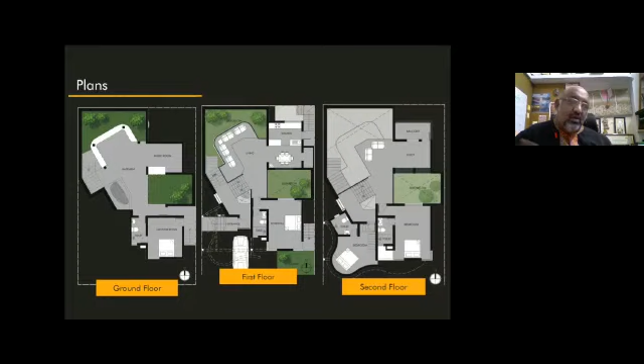The other idea was to try and see in terms of minimizing the total usage of walls. So can it be spaces which move from one volume to another, and in between becomes only private spaces for the bathroom and the bedroom? Otherwise, can each space overlap each other?

So we got a basement where the interaction spaces, entertainment area happens, where the courtyard, the two courtyards happen in the basement, and then we have an attendant's room and attached bathroom for that.

And you enter at the ground level, and then it's split down. It has a split level where you go to the ground floor and you have the living, kitchen, dining space, and one bedroom, and you go down to the basement here.

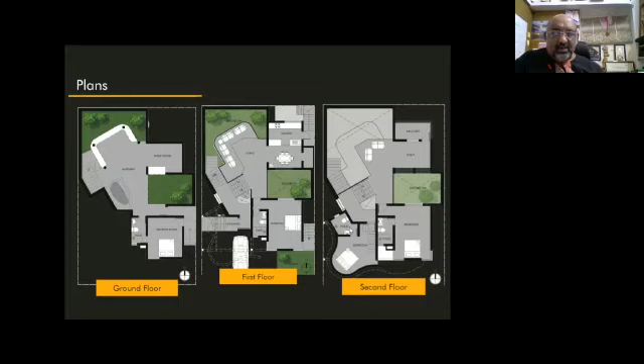You come to the first floor, and at the mid level, you will have the child's bedroom. In the upper level, you will have the bedroom for the parents and the study area with the balcony, overlooking the living and the courtyard spaces on either side.

So somewhere integrate that whole thing together, that was the whole idea. The kids' room, which was the slated element out here, had a double height, had a mezzanine floor for study and things like that.

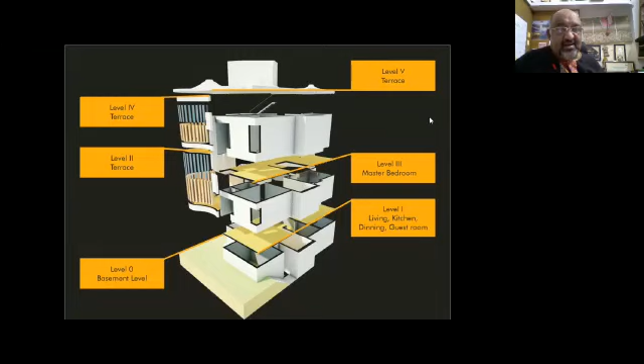So the front volume which you see is actually the kids' room, overlooking the tree there. He gets to see a little bit of birds, and these are mirrored single side window glasses, so he is able to see across from inside the room, but the reflection of the tree is cast on the facade.

This is the basement floor area where the courtyard happens, and basic pots become the lamp fixtures.

This is what we call a filler slab. We need to understand: do I need to load my slab to such a level that its self weight makes it too heavy to spread across? The whole idea of a slab is to spread and transfer its loads onto a beam, and thereby back to a column. Filler slab has been practiced for a long time, infilling the slab with other materials wherever you don't need concrete, reducing its self weight and allowing it to span a larger volume with minimal steel. So you see that happening on the slab.

We had local craftsmen working with oxide floors, a black and yellow oxide floor. We had a very good artist in our office, Sham, who sketched these lines, and the oxide floor people came, chipped out the lines, and filled it with yellow oxide. We got some amazing patterns. You can break even simple systems - the moment we talk about oxide it's red oxide with lines on either side and a green patch, but you can break that and create new geometries.

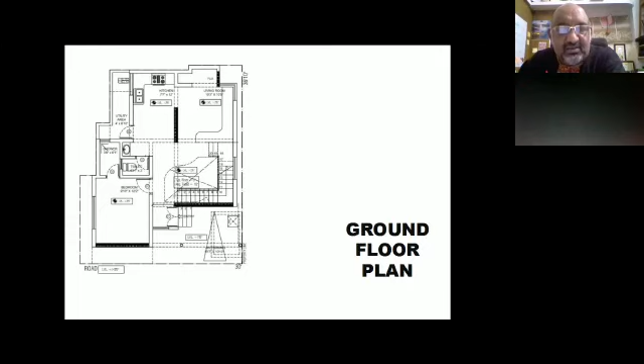Again, a ferrocement wall which becomes a library on the inside - we took the idea of folding the corners of a page when reading a book onto the facade. So it becomes a sculptural element. It doesn't require too much cement or concrete, but it's done out of ferro cement, and becomes very interesting bookshelves on the inside.

This is another challenge which we are doing in a place called Ilkal, in north Karnataka, where temperatures go up to around 47, 48 degrees. We got a chance to design this building for Mr. Niaz Ahmed in Ilkal, where the temperatures are quite high, so we had to really understand how to keep this building cool.

If you look at it, there are hardly any windows to avoid heat gain, but the way the material works, the way the stone walls work in a lot of places, the way courtyards work, and the way the openings - which are basically perforated openings - keep the air cooler as it moves in.

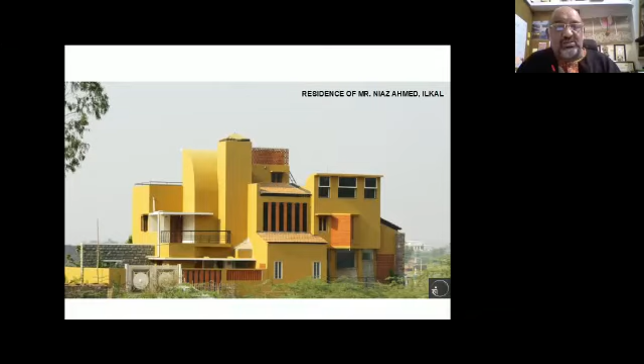Even the water tank is built with jali all around, so it's not heated up - it's always kept cool because of the jali wall around it. A simple example of how the jali wall works: if I keep my mouth wide open and blow, I give out hot air. But if I cup my hand in front of my mouth, close my mouth and blow, I get cool air. So when air goes through a smaller opening, it cools down and cools the place, inside or outside. That was the idea we used in this house.

Again, courtyards and stone as a material take care of the south and west sides so you don't have too much heat gain. Even the heat gain that comes in is taken into a courtyard and then moves inside the house. Only the toilet comes here.

The north side has a courtyard with a water body which takes in the wind and the moisture, passes it through this jali, enters the building, and moves out onto the western side with a smaller opening there. Because the west side also has a large opening, due to air movement we created a garden space or water body space which keeps it cool. Simple things like that.

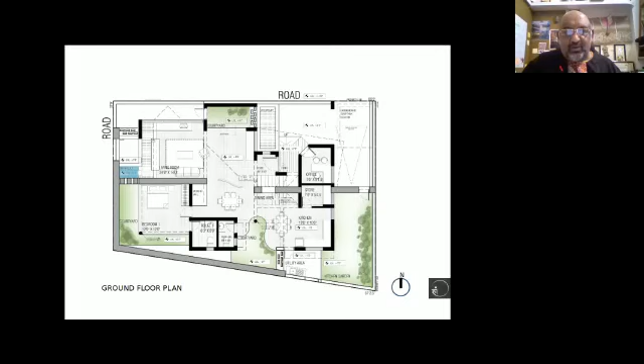He was also a granite quarry owner, so we used all the waste granite from his quarry to build his own house. He asked, 'Can I put a lot of marble inside?' Fortunately, we stopped him from putting marble in the bedrooms, but as a granite quarry owner, he ended up putting a little marble in the living room areas.

This is another project we did for a very good friend of mine, Mr. Kannan and his wife Sangeeta. This was recently done, where we started really looking at designing using steel as a material - can I really look at steel as something that can be reused at a much later stage? This is purely an experimentation of what we were trying to do.

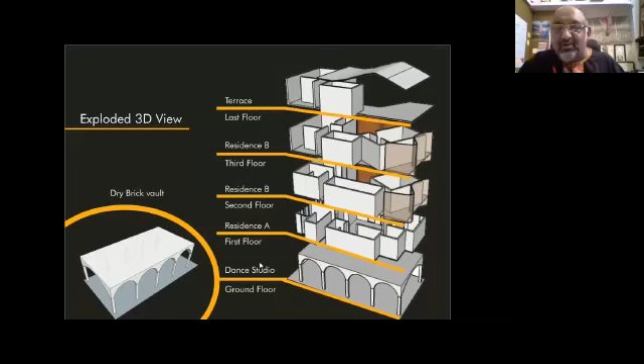The ground floor was designed to be a dance studio. The first floor was supposed to be a two-bedroom house. The second, third, and top floor were supposed to be a four-bedroom house for himself and his parents. Now the ground floor has been converted into a very famous restaurant run by Sangeeta and Kannan called Read Repeat, with some delicious puliyogre and sakkarai pongal there. This is in NR Colony, and it's an amazing place to have your lunch.

What we did was put the staircase and lift core on the road side, thereby cutting down the noise that moves inside, and created the floor plates inside. The whole column-beam structure was in steel, as something we were thinking of trying out - to see whether this is a material which can be reused even after the life of the building.

This is something we are really exploring in the coming days. I see that we've used a little more steel here because this was our first experimentation, but now we've been doing a few more projects where we've changed the way we look at steel, and changed the way steel is even thought of as structural members.

In another project of a similar nature, we questioned: if a tree does not transfer loads at 90 degrees, why should steel columns transfer loads that way? We started looking at the Y-fork, which spans larger areas, and we could save a lot of steel. For a school we designed in Bangalore called Arinco Academy, we used 30% less steel than what was first calculated, just by making the small change of looking at how a tree transfers loads.

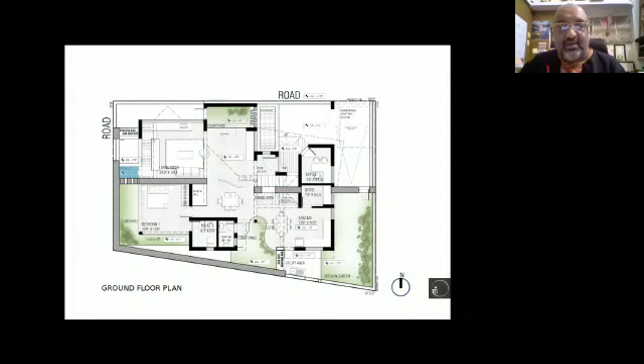At Shashidar's house, we've explored the funicular shell, where we are using clay plates and broken ceramic pieces with ferrocement, with a very simple thin screed concrete on top.

Okay, I think that brings me to the last slide about our projects. This is something we are trying to do, sharing various practices around cost-effective and environmentally sensitive buildings, and we intend to continue this for a long time to come.

Let's see how long. We're looking at sharing different projects from different offices every week. I hope we get the same response we got for today's presentation. We were trying this on a trial basis and had an overwhelming 180 plus registrations for this talk.